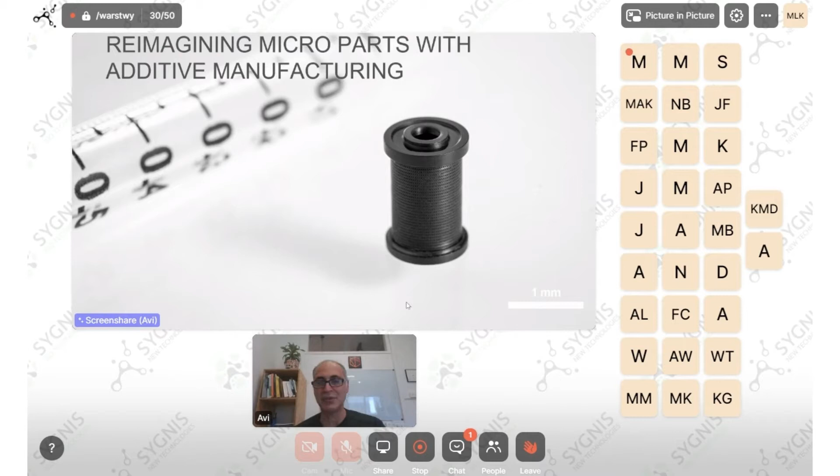That's an amazing number of holes, all of them open in this filter, tiny little parts that when you hold it look like a rice grain. But to understand that things like that become feasible—we do have some customers from medical devices printing things they could not do before, like an insulin pump that you carry with you, something very tiny and small. They could not do all the mechanics before they met the micro additive manufacturing solutions.

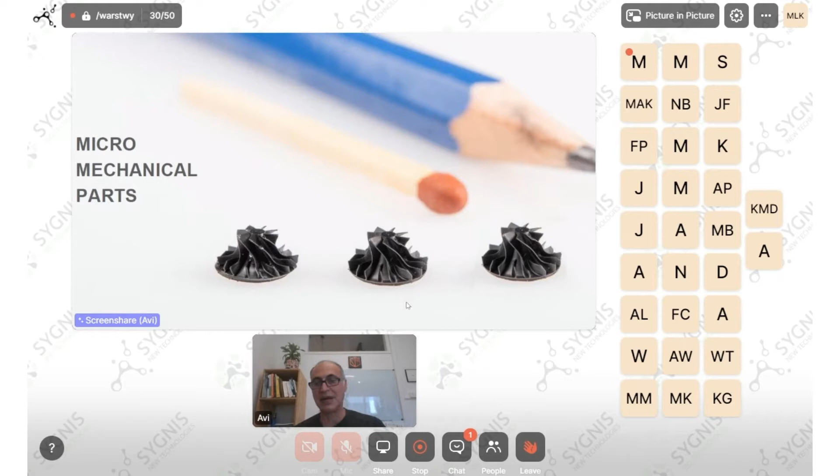Now you can ask why people need it. Who needs microparts anyway? And surprisingly, we find that there is a need and a high demand in different aspects of life and industry.

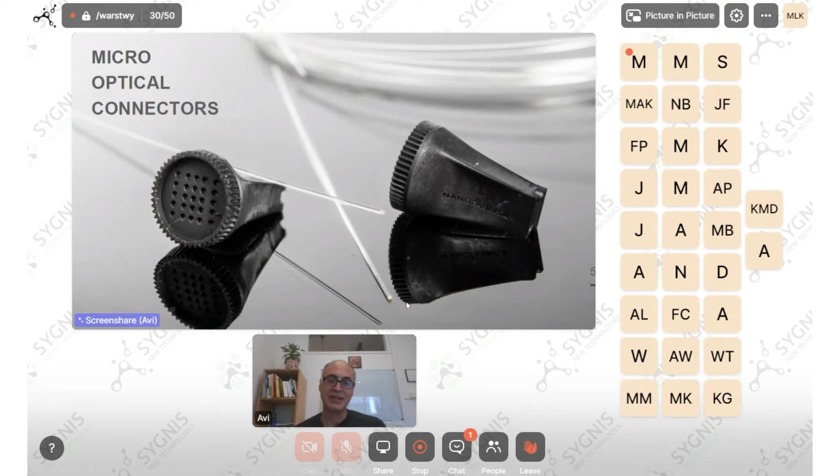The part you see here belongs to optic fiber connectors and adapters. Optic fibers vary between 130 micron in the civil industry to 250 micron in military spec, but they all need to be connected somehow, and many people find there is a big usage for printing these parts—whether for end user parts, prototyping, or production. This is a big industry using micro additive manufacturing as well. About filtration, I also spoke a bit before, so you understand the usage, or can imagine the usage of medical or other micro filters.

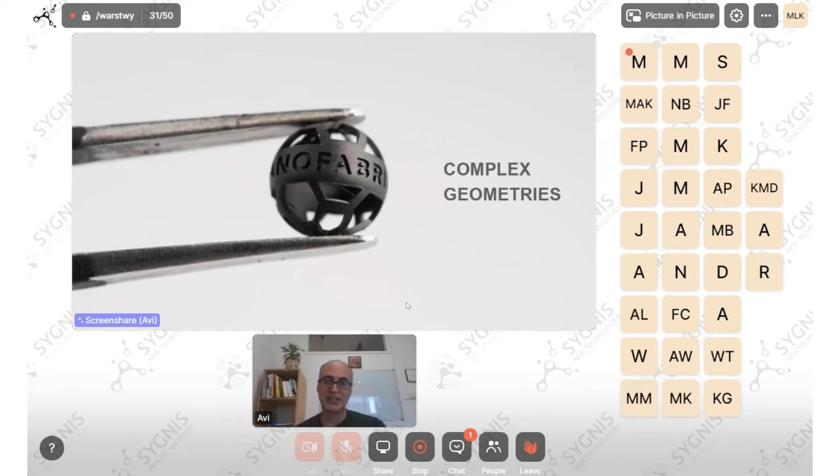The optical world, from mobile phones and others, all use different types of lens holders and equipment that definitely can use micro additive manufacturing parts. And I think this is the last one before we go next. Parts like this, again, you can imagine they are all presented here—1 or few millimeter size features and details of the parts that were printed and shown here.

About 50% of the people that approach us are interested in parts for end use, and the other 50% are normally interested in printing the mold.

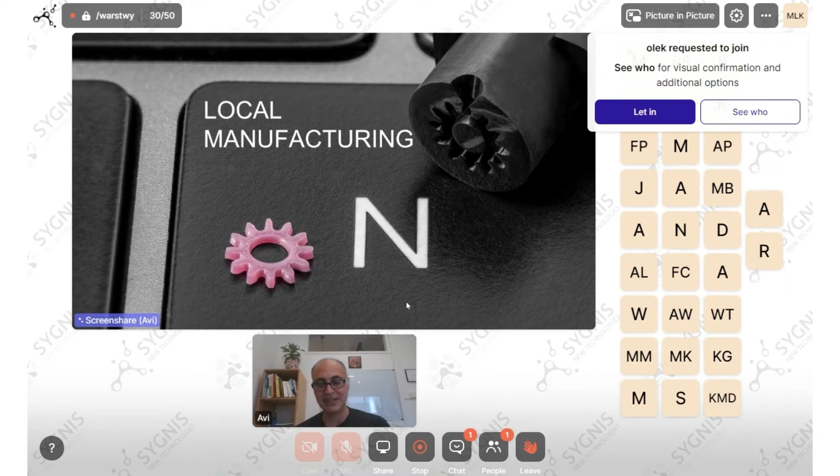In this picture, you can see your laptop, the button of the letter N. If you look at your laptop, using a laptop, the letter N on your laptop—this was pictured there, and the pink part was injected into our printed mold. You can see the nice sharp corners of the wheel, and of course the letters, the characters on top of it. So customers are using the parts to print—they call it an insert because one mold can have many inserts, but we can call it a mold to make it simple—injecting into the mold different types of materials: PE, PP, ABS, delrins, and others.

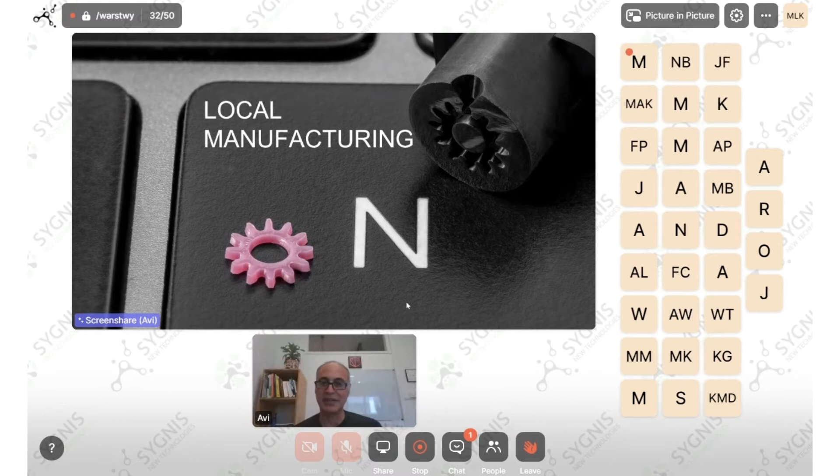And of course, the industrial usage of the parts. But let's go to the main highlight: how does it work? How does this technology work, and what is the ability to bring you micro parts in micro resolution?

This is a little bit of illustration, but just after that there is a movie that shows you more details. So I'm just preparing your understanding before we see the movie. I will put it in a pictorial way so it will not sound too complex for you.

At the bottom of our equipment, there is the DLP, shown on the left picture at the bottom—a LED DLP, which is a digital light processor, like a projector. It projects a picture of 6 mm by 9. This micro projector developed is in the resolution of 4K. That means if you take your 4K television, and instead of the size of your very big television in your house, imagine everything is minimized to be 6 mm, not 60 or 80-inch television, but 6 mm—that's what we are projecting, 4K on a 6 mm size.

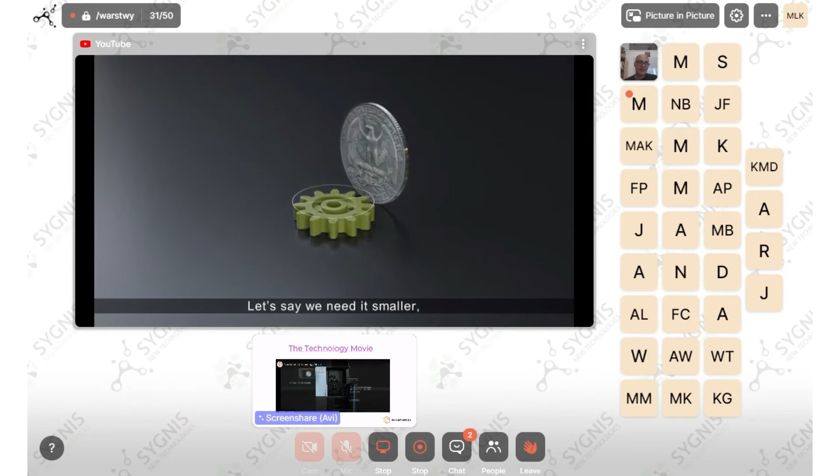This is the first time I'm trying this new movie on a webinar. Let's see if it works well, since it opens a link to YouTube. Let's cross fingers that you can see what I'm about to show. Okay. Is it okay before I continue? Yes, it's perfect.

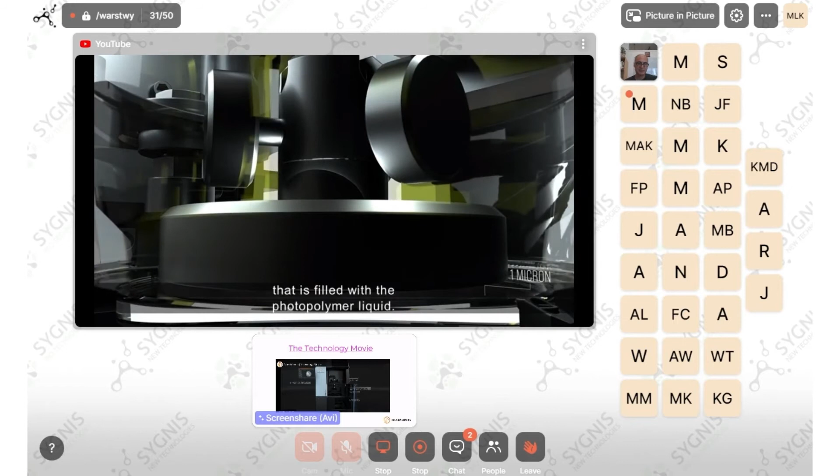Okay, it seems like we're having some hard time. Yes, I think there might be limits of the platform after the update or something. But I think we will have to continue without the video. Alright, so I will go back to my presentation.

So we were talking about the ability, and as I mentioned in the illustration, projecting like a 4K picture and moving the system with adaptive optics, everything sitting on a granite table - the whole machine chassis - projecting and moving every tile to get the micron pixel size: 1.9 micron pixel and 1 micron layer. This is the machine as it looks.

This is the real machine, it's not Photoshop, this is how the machine looks. The name Tera 250 - just to share with you, if the pixel is 1.9 microns and the layer is 1 micron, then the voxel, the three-dimensional pixel, is that size, and the total number of voxels for our building envelope is 250 tera. That's the total number of voxel three-dimensional pixels in our machine - a huge amount of data that we can print.

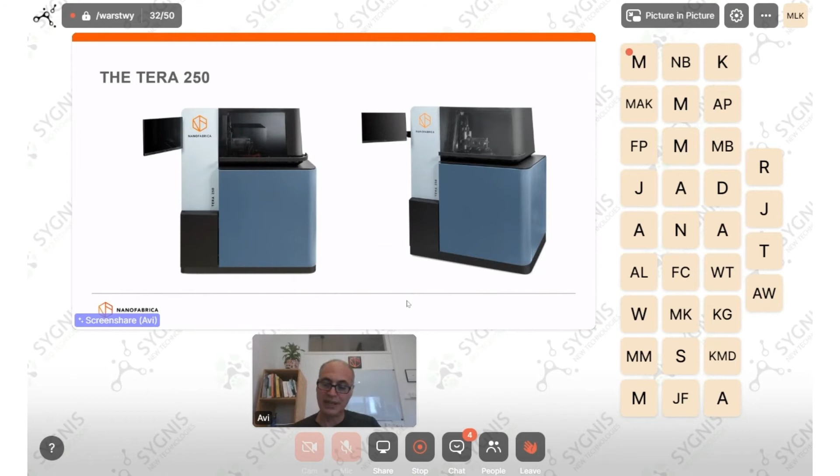The movie is also available on our website, Nanofabrica, in the technology tab, so you can always take a look there. I learned that in webinars it's also difficult to show movies, so I apologize - this is the first time I'm doing it here.

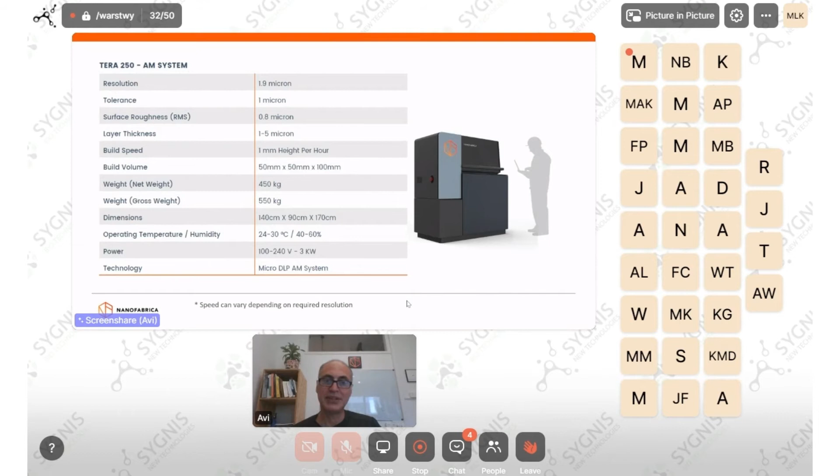So we talked about the resolution, 1.9 micron, the tolerances, the surface finish, and the layer thickness. And the building print time is 1 millimeter height per hour for the complete building envelope.

At the moment, the first material we released was an ABS-like material called Precision N800 - an ABS plastic. Following that, we are releasing a composite material, reinforced with ceramic at around 50% loading, meaning 50% of the liquid will be nanoparticles of ceramic. It's not a ceramic material, it's a plastic reinforced with ceramic nanoparticles, giving higher temperature resistance, wear resistance, and other properties. Imagine you want to print wheels or gears that need to handle many years ahead and need to be very strong - you can do that with this composite material.

The software developed in the process was also a very big part. I won't go into too much detail but can give you some ideas - how do you project? Do you project the whole picture or part of it? First the boundaries of the parts, then inside. A lot of tricks were developed and many patents filed to support our high-resolution micron additive manufacturing system.

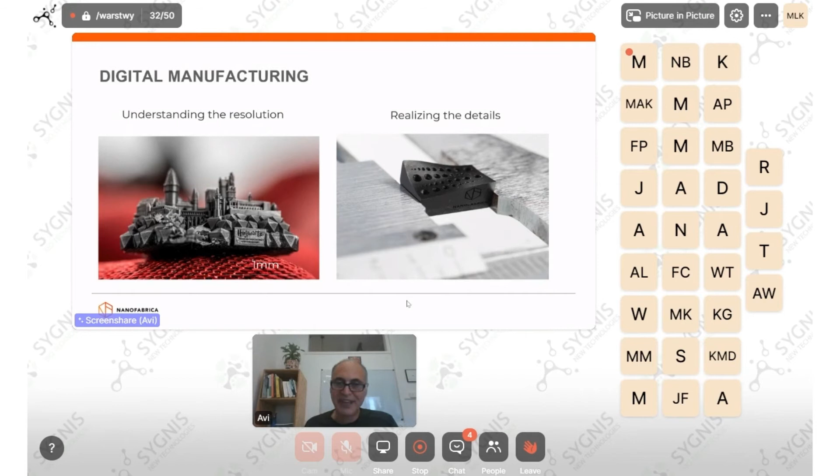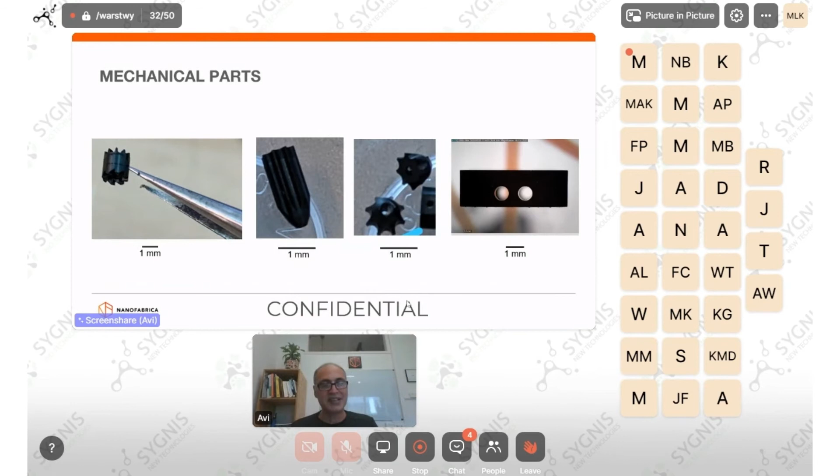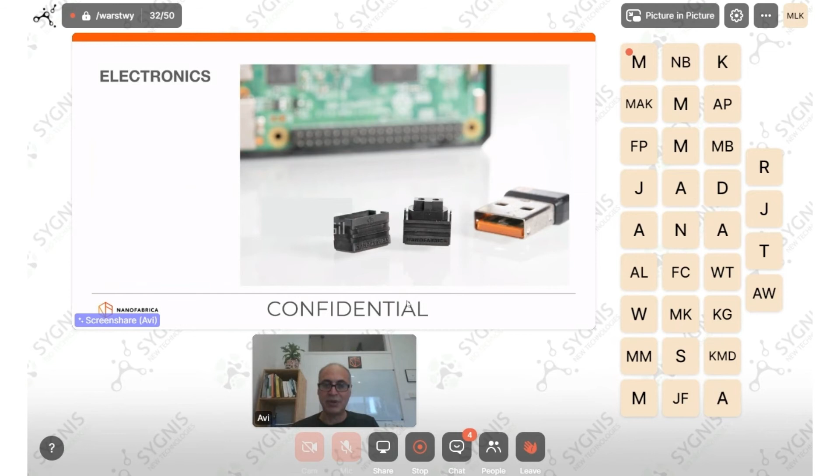Looking at different types of usage, it starts from typical micro parts in additive manufacturing, different mechanical parts, gear shafts - you remember I told you about the micro insulin pump, so just for example, a lot of gears inside and cases. In electronics, a lot of tiny little connectors. Electronics can go very, very small today, but what about the casing or the connectors that cannot become that small anymore? This is where they use our equipment.

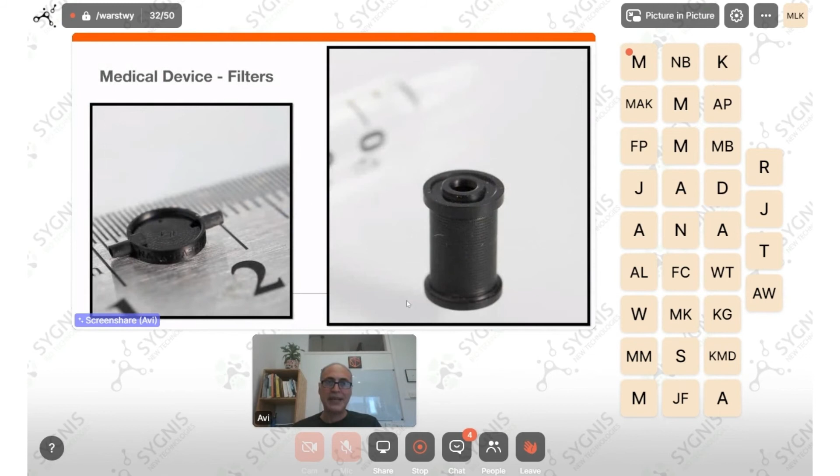Medical devices and filtration - I think we already discussed this one, so we covered this. Microfluidics and the ability to print tiny little holes, 20 micron radius or up, is also a very big market.

Many of you maybe know Elon Musk. When you say Elon Musk, you think about Tesla or SpaceX, but Elon Musk has another company called Neuralink that just recently did a very nice test with monkeys to connect their mind to actual computers. The idea was to assist paralyzed people, but for this they needed tiny little micro nozzles for needles, and they were very happy to use our equipment to print equipment to deliver the micro needles and electronic probes connected to this medical operation.

In optics, a growing industry, we also discussed - mainly they are using it for lens holders and others, lens mounting or similar parts.

We talked about molds - let's print the mold. Instead of printing the part, let's print the mold. We can inject any material we want in any color we want. Anyway, it's a small mold, so we can print many in one shot. That's also a possibility. I want to share with you that the micro injection molding machine is different than what you think. If you know injection machines, 30 ton, 50 ton, very big, very expensive - the micro injection molding machine is very low cost, less than 10,000 euros. It's even a desktop or bench device, doesn't take much place. Don't forget, we inject 1 gram, not 500 grams. So it's a very small and light piece of equipment.